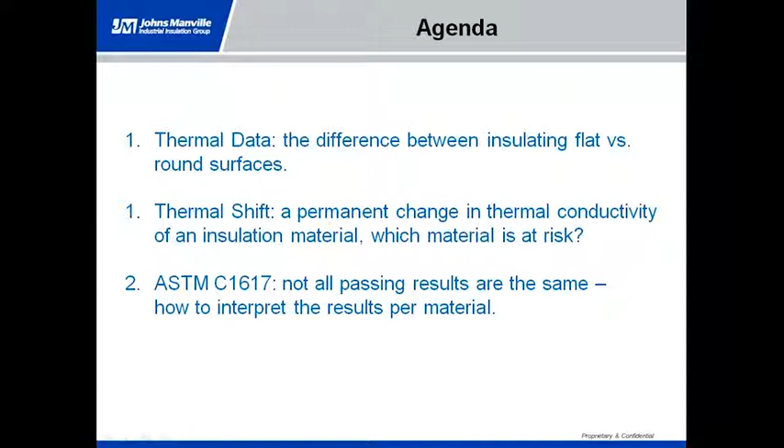Not all passing results are the same. I'll explain the differences in passing results and thresholds for ASTM C1617 for each of the standard industrial insulation materials. To start, insulation covers a very wide range of temperatures, from as low as minus 450 degrees Fahrenheit up to 3,000 degrees Fahrenheit. For industrial installations, and for the focus of this presentation, we'll limit that range to 61 degrees Fahrenheit to 1,500 degrees Fahrenheit.

Johns Manville does offer products that can be used in the low temperature range, as well as products that can be used in the low end of the refractory range, but the focus here will primarily be on the intermediate and high temperatures.

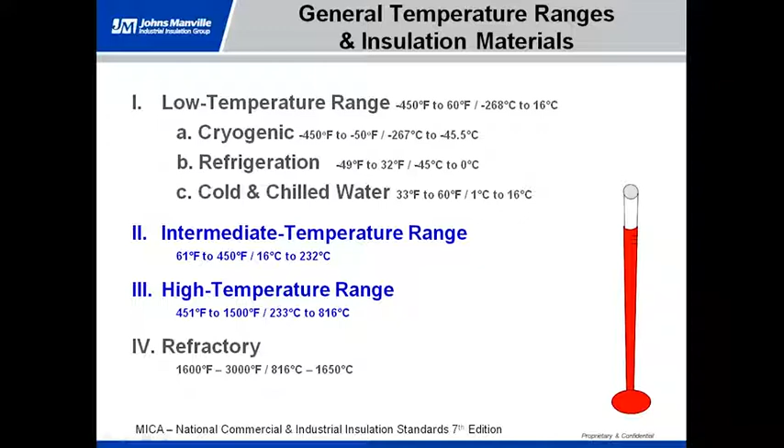Here are some examples of insulation material types we have. Note that the majority of materials used in intermediate to high temperature ranges are silica based. There are also foams, both plastic and glass, which provide better low temperature performance due to their inherent moisture-resistant properties. The problem with higher temperatures and foam insulations is that heat tends to deteriorate these materials. Cellular glass is also a good option for low temperature applications because it has pretty good resistance to moisture infiltration.

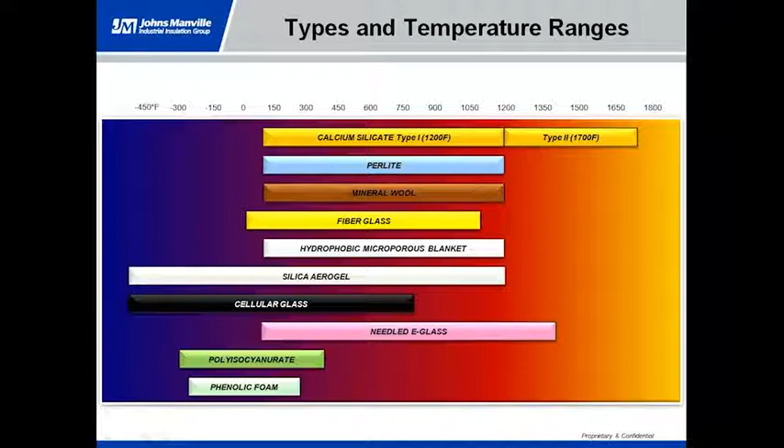We find intermediate and high temperature applications in industrial processes primarily focused on refining, processing, power generation, manufacturing, and marine. Insulations used in these applications must be able to resist heat, physical stresses, vibration, and worker traffic. This is probably the most demanding insulation category there is. Energy-intensive processes benefit from insulation for many reasons, which we'll cover next.

There are 9 good reasons to use insulation, but we'll focus on 3 aspects. First, personnel protection from hot pipes and vessels — we want to keep surface temperature at 140 degrees Fahrenheit or lower to reduce the risk of first-degree burns. It also provides a cooler work environment that reduces the risk of heat stroke. If the piping runs indoors, insulation can also help reduce the interior temperature of the building, which lowers the air conditioning or heat load.

The second aspect is improved process control and heat conservation. The more you can maintain your process within a given range, the easier it is to keep that process from fluctuating dramatically. This also means you can count on using the same amount of energy, so you're not constantly trying to heat things up to compensate for heat lost through ineffective or compromised insulation. The other thing, which most people don't think about, is corrosion protection.

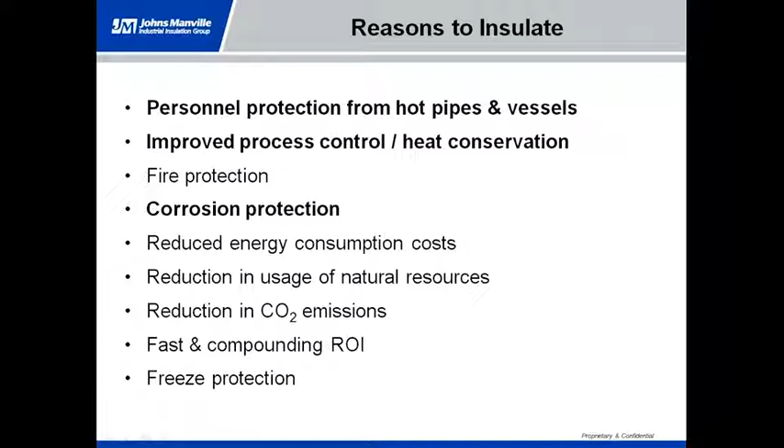The first topic we're going to talk about is thermal data and the difference between insulating round versus flat surfaces. We want to make sure you're using the right information. The challenge is there are several sources for thermal data: manufacturers' data sheets, trade organizations, the internet, and the American Society for Testing and Materials, or ASTM.

Now, the consequences of using the wrong data are increased heat loss, which is wasted resources and money. You have higher insulation surface temperatures, which means a higher potential for burns. And if it's inside, we have a higher likelihood of heat stroke and an increased air conditioning load.

The other thing we don't normally think about with insulation is we want to make sure we have a factor of safety with the products we're considering using. That gives a little bit of flexibility and a cushion in our system, so in case something does become compromised, it's not going to be as bad when a safety factor is built into it.

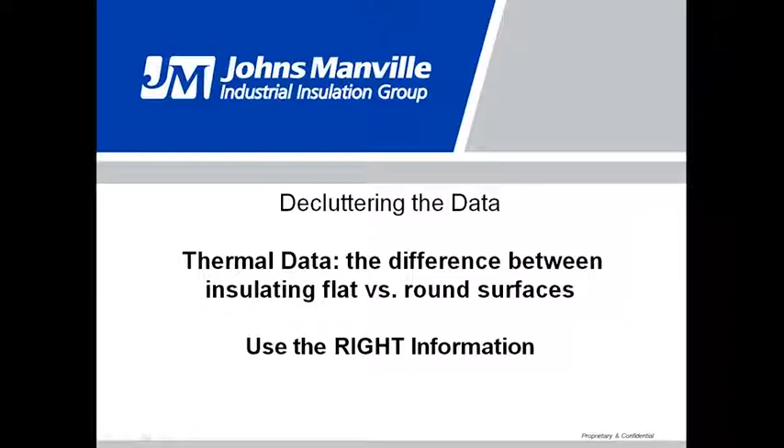Now, when we talk about thermal data, the first place we start is looking at K values. A K value is the thermal conductivity of a material. The units for that are on the left-hand axis, where a K value, at least in U.S. units, is BTU inches per hour square foot per Fahrenheit degree. Or in metric, it would be watts per meter Kelvin.

Basically, this thermal conductivity is a measure of how much heat flows through a material in a given period of time. The lower the K value, the lower the amount of heat that travels through a material in a given period of time.

Now, in all cases, note that as you go from a lower temperature of 100 degrees up to 800 degrees, the thermal conductivity goes up, which means the rate that heat flows through the material also goes up. This is largely a component of radiative heat transfer.

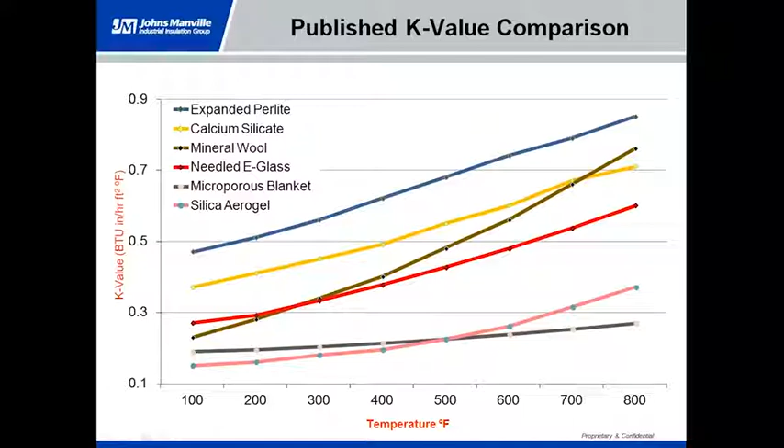Now, because K values are a thermal property, we can measure that performance quite easily. We simply have a hot plate, which in this apparatus would be either the top or the bottom, and a cold plate on the opposite side. You just measure how much energy you have to put into the hot plate to keep everything at equilibrium. For example, for most building insulation, the hot plate would be at 100 degrees, the lower plate at 50 degrees, for a mean temperature of 75, and you apply only enough heat to maintain those temperatures. From that, you can determine what that K value is.

So I just used the 75 degree mean temperature reference, and of course with industrial insulation it starts at 100 and goes all the way to 1200 to 1500 degrees.

So the flat test is pretty straightforward. It's what they call one-dimensional heat flow, and those typically give the best results, or the lowest results, I should say. If you look at ASTM C335, it's a little bit different.

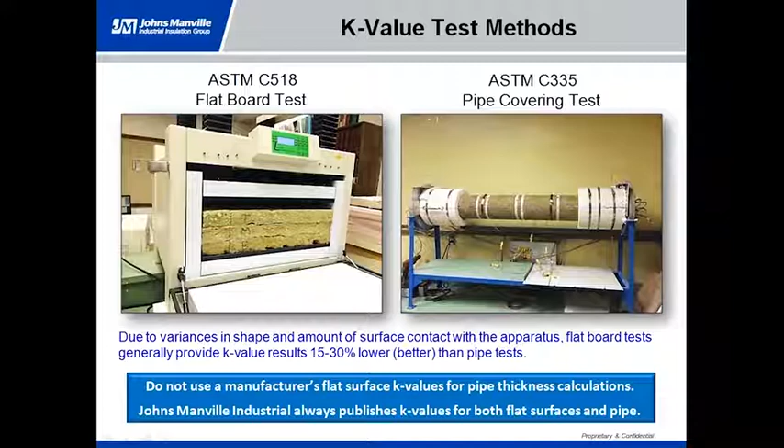So to start off with, we talk about material specs, and in this case we have calcium silicate. ASTM has a standard specification for all insulation material types. They have them for calcium silicate, perlite, mineral wool, microporous, and silica aerogel products.

Now, looking at this set of data, we have ASTM C518, which is flat testing, and we develop a thermal curve. And how we do this, again, we started at a set point at 100 degrees. So we have a hot plate, a cold plate. We wait for everything to come at equilibrium. We take a measurement. We increase the mean temperature to 200 degrees. Wait for it to come to equilibrium. We take another measurement. We do that until we get to, in this example, up to 900 degrees. Kind of another giveaway that this is flat testing is we can go up to 900 degrees and still get a decent data point.

Now, when we do the round testing, again, we have that mean temperature that's much harder to accommodate because we have to get our pipe temperature so hot. So if you look at the data here between 100 and 200 degrees, very similar, probably within the uncertainties of the test method, so there's some overlap there. But at 300 degrees, we see that things start to change a little bit. And again, we also notice that the pipe testing is translated up. So a higher value means we're going to have more heat loss than we're going to have with a lower value.

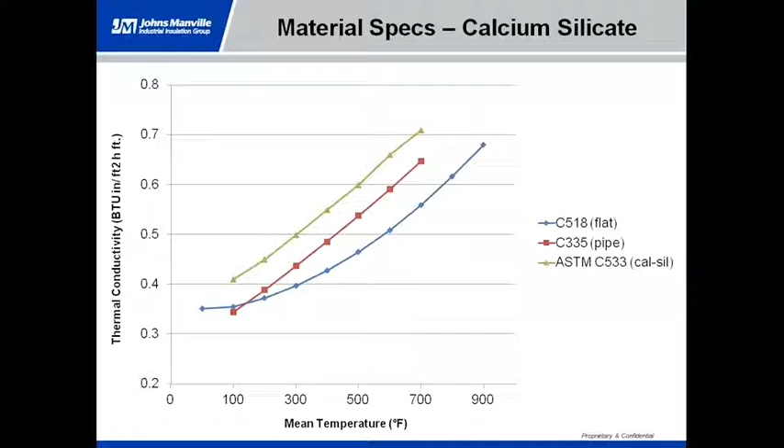Now, if we look at all the products in this category, just looking for example in the upper left-hand corner, you can see that the standard specification, the same slide we looked at before, scaled a bit differently, but you see that our ASTM line is the highest.

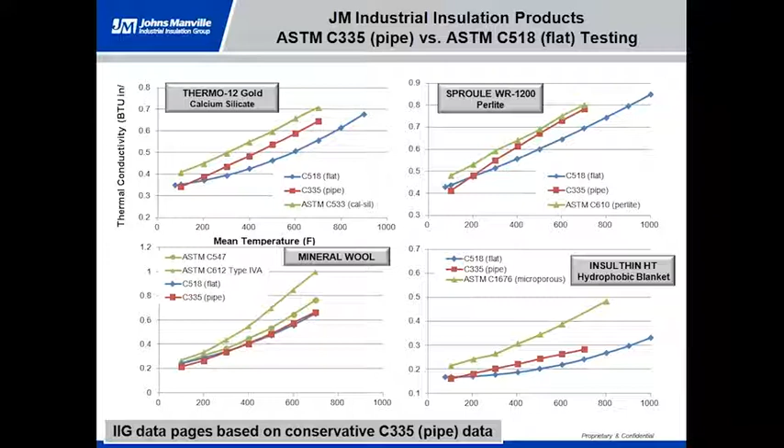Next we have our pipe data, and below that our flat data. Looking over at Sproule, you see the same thing. If you go down to the lower left-hand corner, there's kind of an exception here. We talk about mineral wool. ASTM C547 is for the pipe configuration, and that has thermal values that are in the standard. Then there's also ASTM C612, a board standard specification with different requirements, which you can see is the higher line of those two greens. If you look, the product is still well below those lines. And then of course we have microporous in the lower right-hand corner.

Now, one example we have is silica aerogel blankets. This is kind of unique in the ASTM standard specification in that you have both flat and round values in the same standard. The closest thing on the prior example was mineral wool, where we had a different standard specification—one for boards, a different one for pipe. Silica aerogel incorporated those two thermal curves into one standard specification. So this is the line you're going to see for flat data. There's another line for the pipe data, and of course the product has to be at or below that line as well when tested in a pipe configuration.

Now here's the plot for flat data, and maybe kind of a giveaway—this was actually from a silica aerogel manufacturer's data sheet. If you look at this plot, it goes up to 1100 degrees, which tells us it's flat testing. Notice that it lays right on top of the ASTM C1728 flat testing, the C518 testing. So looking at this, I think it's safe to say that the ASTM and the data sheet are in agreement as far as what the requirements are, below the 1728 line.

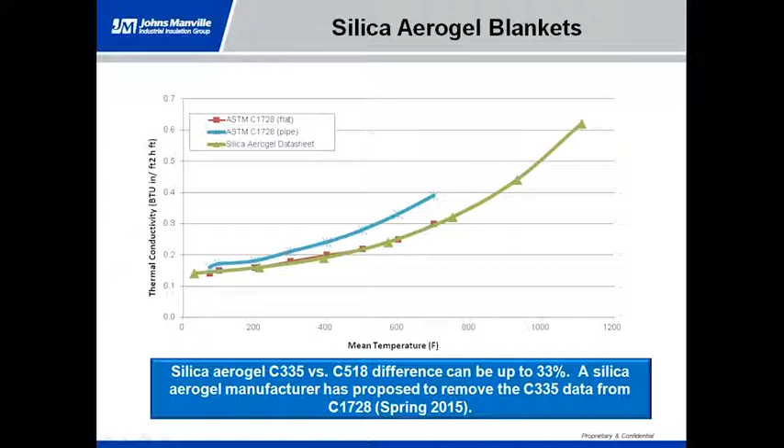Now, there has been a proposal to remove the pipe section altogether, which of course people have the right to do. But the concern is, number one, if you don't have that information there, how are you going to know which application this is for unless it's explicitly stated in the standard? But the other thing—if you look at the ASTM or the silica aerogel line and the ASTM line, they overlap. Whereas on the previous slide, you could see that the products tested were significantly below that ASTM line, so there's enough room for production variation or installation defects, things like that, that you could get by with using something that had been compromised or was a little bit off.

But in this case, because our data sheet and our ASTM requirements are kind of in line, we better hope that product we're using is going to perform the way it says, and maybe we need to add a factor of safety when specifying the silica aerogel blanket to make sure we have enough thickness there to cover our thermal requirements.

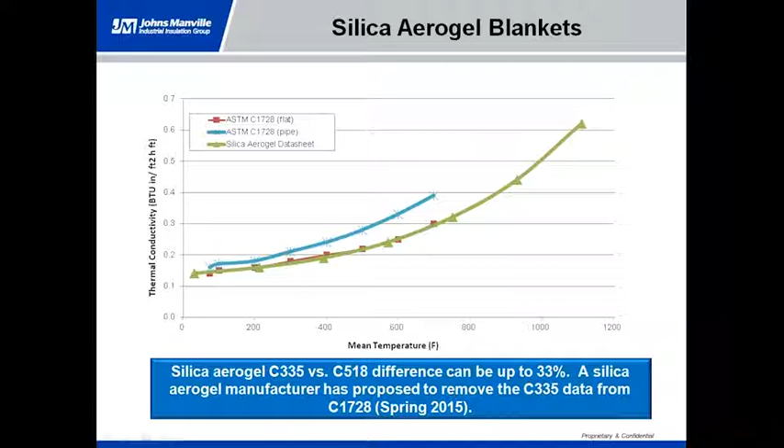Now, the first question that comes to mind is, well, that's great, but where do we get this data? The good news is that NAIMA, the North American Insulation Manufacturers Association, has 3E Plus software, which is free, and it comes preloaded with ASTM standard specifications for all insulation material types.

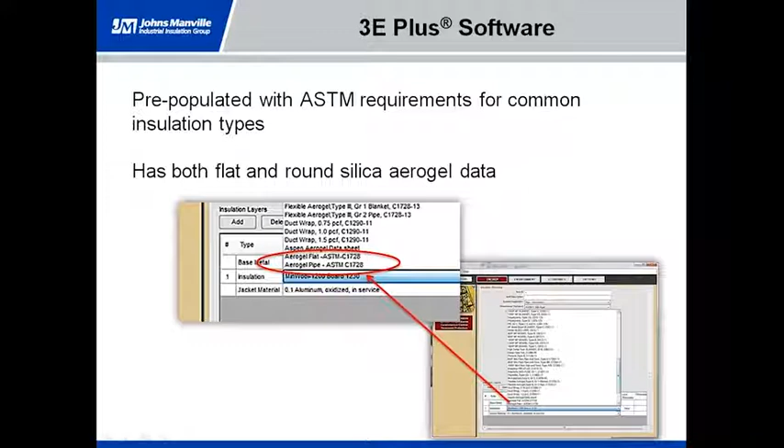And so, as we've been talking about, even preloaded into this software, we have aerogel flat versus aerogel pipe, with the ASTM requirements already built in. And if you look at the duct wrap product shown above, it shows the different densities, and the ASTM—in this case 1290-11—shows all the different thermal values for those products. So again, this doesn't come from manufacturer's data, but from ASTM, already preloaded. You don't have to go out and look for this data—it's already there.

Now here's one thing we haven't really talked about: a real-world example of why we care that there's a difference between flat versus round data. Looking at this example, we used an 8-inch pipe, 2,600 feet in length, under the conditions shown above.

If you look at the product used, if you would have selected the C518 data in the 3E Plus software versus C335, you would have had a 12-degree temperature difference, which would put you from a below 140-degree safe-to-touch temperature to 150, meaning you'd burn within a second after touching that hot surface. There's also a 55 BTU per hour per foot difference.

Which doesn't sound like a lot, but when you're talking about long lengths of pipe over long periods of time, going through our example, that's almost $7,000 a year, which is almost $140,000 over 20 years.

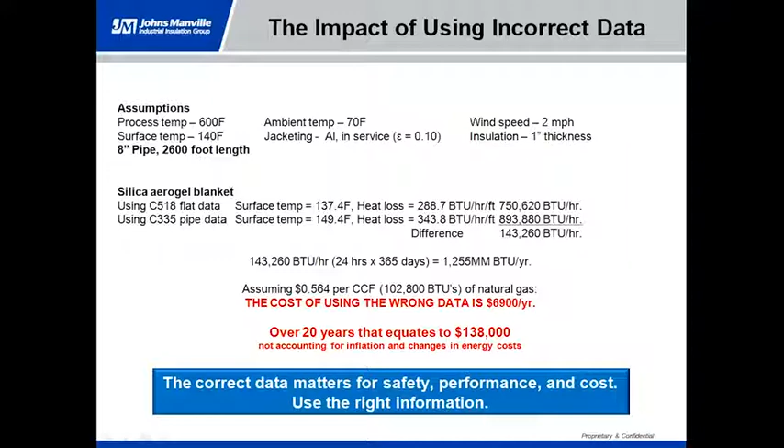So this is real money, and this isn't even at a particularly high temperature—if you have higher temperatures and longer lengths, these savings add up very quickly. So there's a real-world consequence to using the wrong data. It's a lot easier to add an increment as you're putting things together rather than having to go back and fix a hot surface or a system using more energy than it's supposed to.

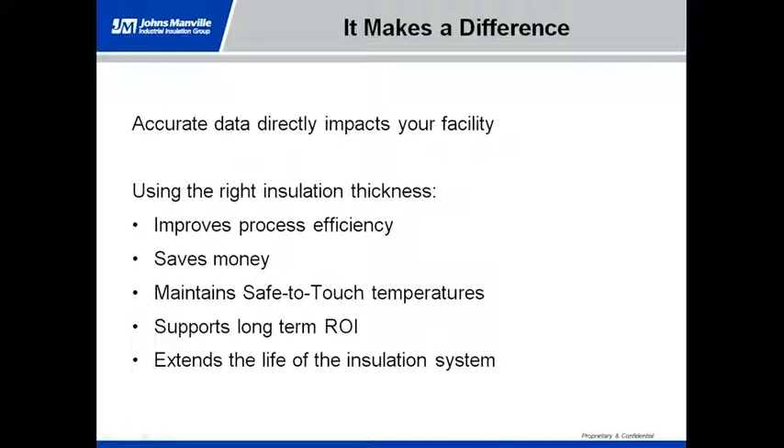So we talked about round versus flat testing and the potential implications of using the wrong data. Now that we know what information we can rely on, we can move on to thermal shift. Again, we want to make sure we're looking at this properly so we improve our process efficiency, save the money we're supposed to, maintain our safe-to-touch temperature, and make sure we have a good system we can rely on.

We begin our next topic: thermal shift. It's a permanent change in material conductivity of an insulation material, and there is a material that is at risk.

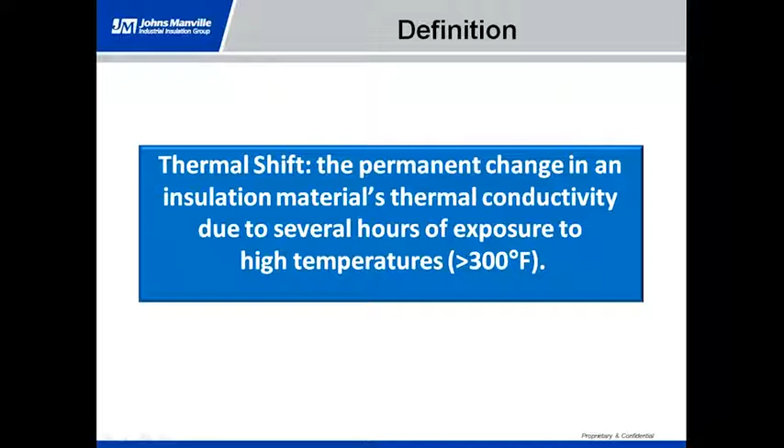We started this discussion with a definition: it's the permanent change in an insulation material's thermal conductivity due to several hours of exposure to high temperatures. The implication, of course, is that the thermal conductivity is going to increase, allowing a greater rate of heat transfer, meaning higher rates of heat loss or higher safe-to-touch temperatures.

So why is thermal shift bad? When we increase thermal conductivity, we increase heat flow, decrease thermal performance, and have higher heat loss and surface temperatures. Because of those increased heat flows and higher surface temperatures, we have increased burn potential and higher operating costs.

The material that's affected by this is the silica aerogel blanket. The traditional insulations we talked about earlier—calcium silicate, mineral wool, perlite, and microporous insulations—aren't affected by this.

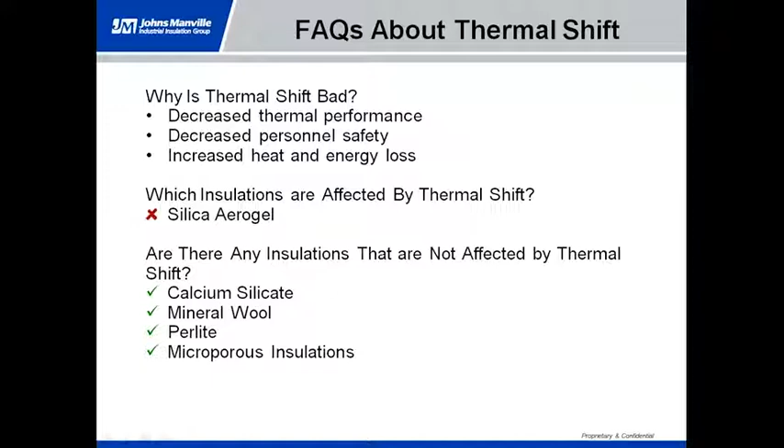To give you an example, this is what we tested, done using flat testing. Note on each of these plots we have the ASTM line, the purple line translated up from all the other lines. The two lines below it represent testing we described earlier, where we tested each individual set point, let everything cool, then tested it again.

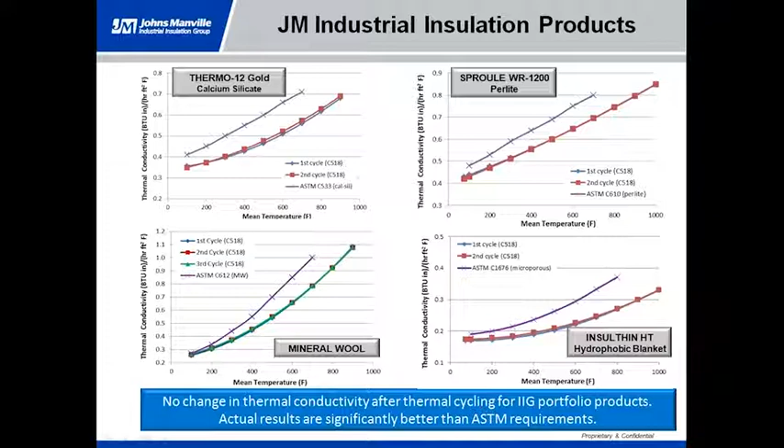What we saw is there are some very slight changes, as you can see with the THERMO-12 Gold calcium silicate product, and maybe a little with the InsulThin HT product, but generally those differences are very small, and one could argue they're within the uncertainty of the test method. I think it's fair to say those results are equivalent—there's no real change in thermal performance of these products, and they perform significantly better than what their ASTM standard specification requires.

Now, we did the same test with the silica aerogel blanket, and here's what we found. We start off with the ASTM C1728 maximum, which we saw in an earlier slide, and just below that, the blue line shows the first cycle of flat testing we had done with the silica aerogel blanket. For the most part, most of that product performs below the line, which is good. At some of the higher temperatures it's above—does it pass, does it fail?

I guess it depends on which temperature you're using, but maybe you could argue that it's close enough if that works for you. In my mind, it either passes or it doesn't. But when you test this product the second time, you see that the thermal performance translates up, and at no point does that product meet that specification, and it's considerably lower than that. So that's a problem. We're not talking just a few BTUs. This is a lot of energy and a lot of temperature we're dealing with here.

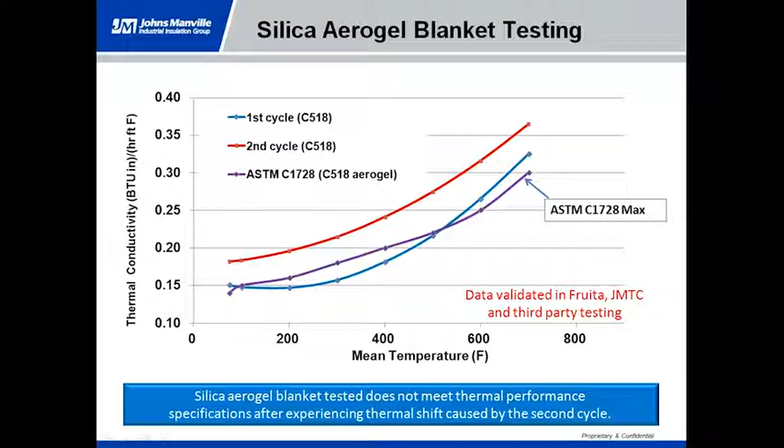Now, this isn't something specific to JM. We sent this to an outside lab to test this, to verify this, and this does occur. We'll see more about this on a subsequent slide.

So if we're looking at this, comparing it to the C335 round or pipe testing, again we see the same thing. There's a translation as it shifts up when we test it the second time. If you look at the two lower lines overlapping each other, that was our InsulThin blanket insulation that we also tested in the same configuration. Note that you can't see any appreciable difference between the two.

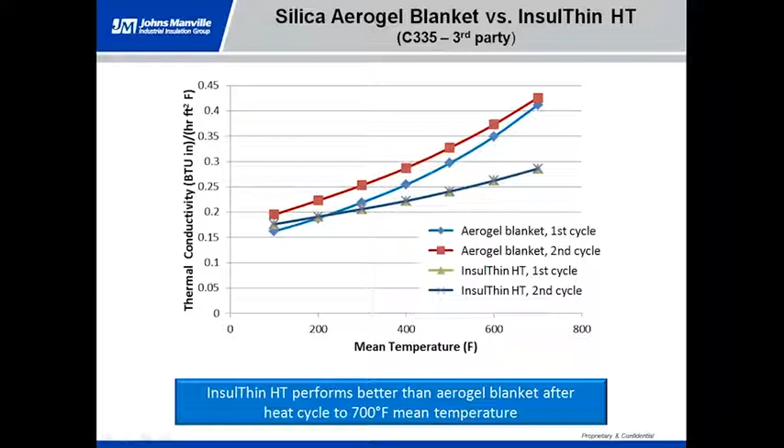And again, if you look at how the product performs at higher temperatures, it does a really good job. So the big question is, what exactly happens to the Silica aerogel product? Well, part of the requirements for the product is that a hydrophobe is added to help resist, to give some water repellency. But this hydrophobe oxidizes at 300 to 600 degrees.

As this hydrophobe oxidizes, the aerogel structure is compromised, which results in a fracturing of the aerogel matrix, meaning it breaks everything up. Now when this happens, the thermal performance is permanently compromised and heat-affected areas are no longer hydrophobic. Because we've already fractured this, we can't put everything back together again. And because of this, our thermal performance degrades to roughly the performance of the needle glass mat used as a substrate for this blanket product.

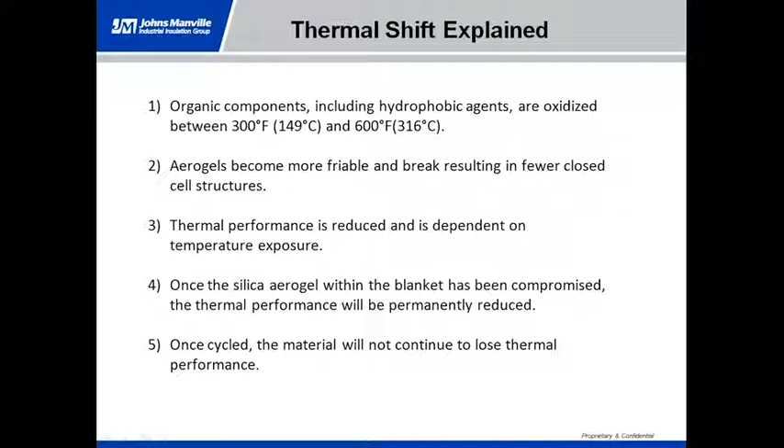Now, what aerogel does is provide all these small air pockets, but if all these air pockets are fractured and turned into much smaller pieces, there's nothing there to help reduce that heat transfer, that heat flow through the material. Now, because we've oxidized that hydrophobe on there, our product is no longer water repellent once it's been exposed to temperatures of 300 degrees or above.

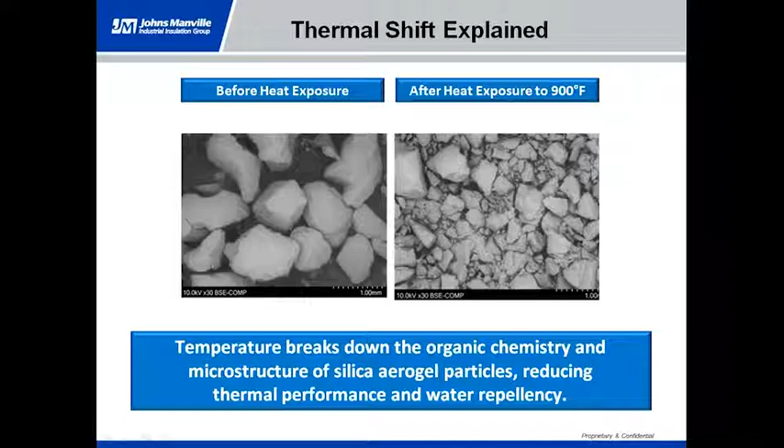Now, because it causes a permanent physical change, and we do know this happens, there's a way to work around that. Combining our first point about round versus flat data, we're going to combine that with thermal shifting to show how we can get around this.

If you look at our first example, it's an 800-degree pipe, and we have flat design ASTM data versus our thermal shifted data. You can see that if we use our design data, we're at a 45 millimeter thickness with a surface temperature of 138 degrees. But if we use the thermal shift data for the same thickness, our surface temperature is now 150 degrees. Now we need a 55 millimeter thickness to get our surface temperature back down to 140 degrees.

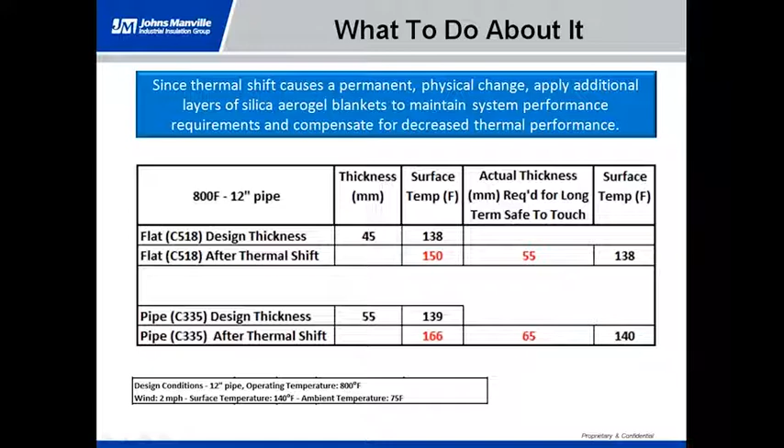So of course, we know our pipe data is not going to perform as well as our flat data. So our initial thickness starts at 55 millimeters for 140 degrees. But again, if we use our thermal shifted data, surface temperature is now 166 degrees. So again, we have to add additional thickness, 10 millimeters, to make a 65 millimeter thickness to get our surface temperature down to 140 degrees.

So long story short, those materials can be used, but there are some things you need to do. You're going to have to add at least one layer to make sure that you're bringing your temperatures and your heat losses down to what they were prior to that compromised value.

Moving on to our final topic, we're going to talk about ASTM C1617 and that not all passing results are the same.

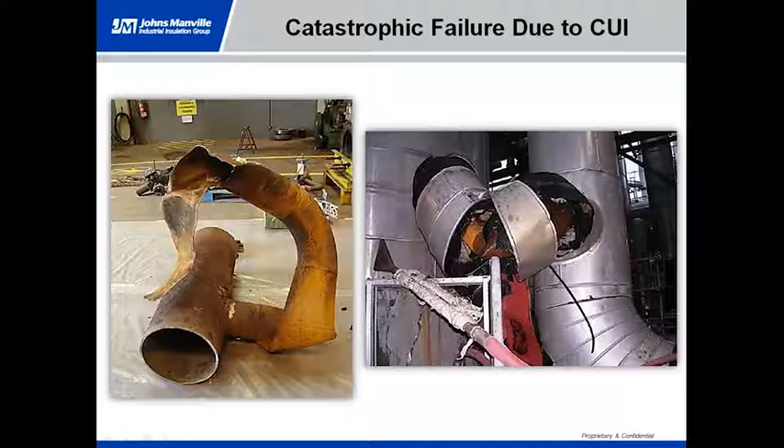In the course of construction and maintenance, it's necessary for insulated equipment to be idle for long periods of time, and during this time moisture can and most likely does infiltrate the system. It's usually exposed through sudden storms, improper storage, improper installation, damage to the jacketing, or damage to the lagging. All the above can allow moisture to penetrate into the system. Now, all these scenarios create a potential situation for corrosion under the insulation, and the results can be catastrophic, as we see in these pictures here, where things corrode to the extent where they rupture and create significant damage, not to mention downtime.

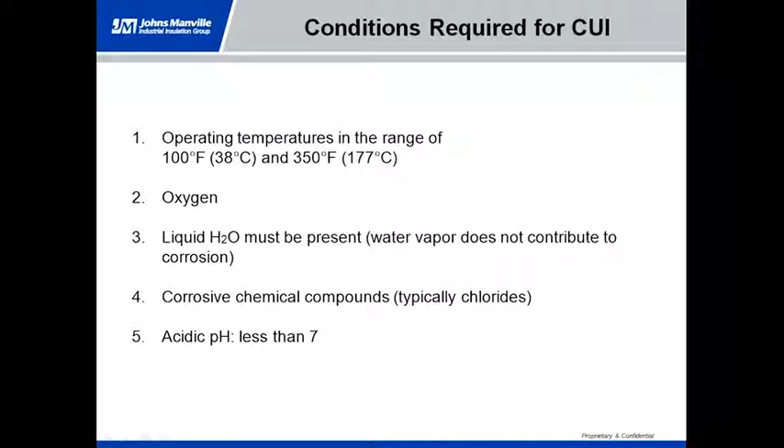Now, what we need for corrosion to happen is an operating temperature of 100 to 350 degrees. Corrosion can also occur outside of that range, but this is the sweet spot for corrosion. We need oxygen, we need liquid water to be present. Now, water vapor or high humidity conditions doesn't contribute to corrosion—you need to have a liquid to help conduct or facilitate corrosion. You need corrosive chemical compounds, which are typically chlorides found in seawater and drinking water, and then acidic pH, which means it has to have a pH value of less than 7.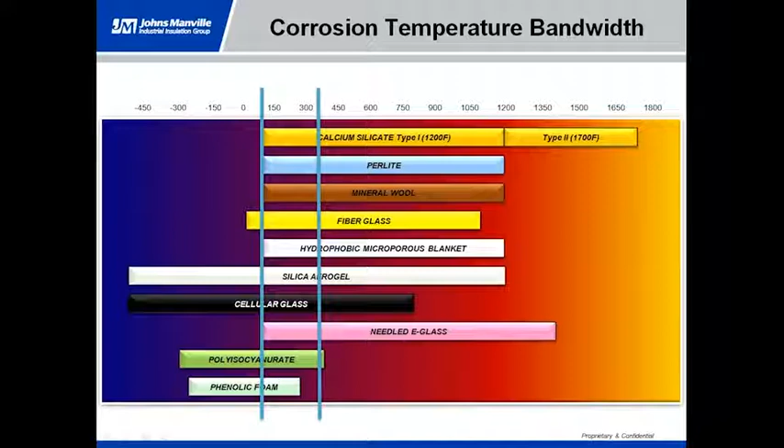And again, every insulation type in that temperature range is going to fall into that, whether it's a polyiso foam or a calcium silicate pipe insulation.

Now, there's a new method that was developed by many manufacturers, and corrosion testing is always a problem because you always want something that's quick enough to model real life, but also has to be realistic and applicable. In this case, this test method is applicable to carbon steel. The advantage it has is it's more quantitative than qualitative, compared with some of the other methods, and it's developed mostly for carbon steel—there aren't as many test methods out there for that.

Now, what's involved with this test is the insulation material is ground up with distilled water. You take a metal coupon and weigh it, then glue a tube to it, which you see in the image on the right-hand side, and you drip this insulation solution on top of a plate heated to 230 degrees plus or minus 10 degrees. The point is that as this water boils off the surface with this leachate, it creates a very corrosive environment. That's what we're trying to simulate, but not to the point where you're dropping water on something really hot, or trying to boil water off because it wasn't hot enough—it's just the right mixture of boiling to corrode.

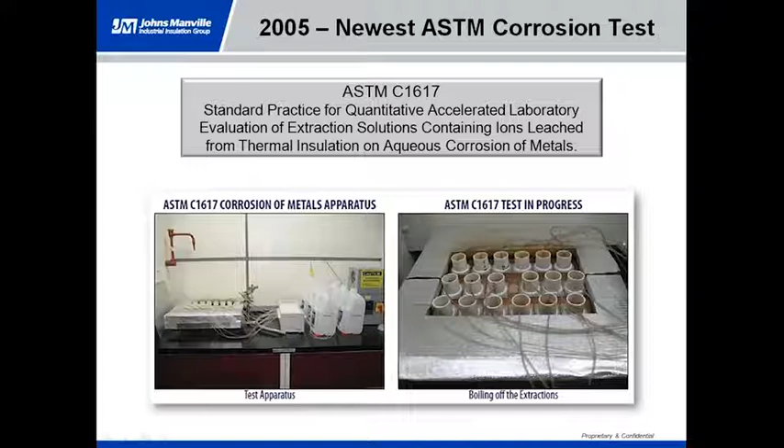Once the test is run, for 96 hours, those coupons are cleaned and then weighed, and that change in weight is used to give you a mass loss corrosion rate in mils per year, or MCLR. Now, whenever we run this test, to make sure you're not running it in a vacuum, you always want some control as a reference point. There are 3 that are typically used, and 4 available, but 3 typically used: one is DI water, or deionized or distilled water, which has less than 0.1 part per million of chloride solution; there's a 1 part per million chloride solution, and a 5 part per million chloride solution. So the higher the concentration of the chloride solution, the higher the corrosion rate.

So what happens is, when we get done, we have a kind of ranking here. Going from left to right: mineral wool, and even jumping in the middle where the pre-2002 calcium silicate is, you have pretty high corrosion rates. Silica aerogel is a little bit better. You look at InsulThin and DI water, they're about the same. And then you have the Thermo-12 Gold and the Sproule products, which are below DI water. So what this means in terms of corrosion, if you look at the boxes on the left-hand side, is your deionized water has a mass loss corrosion rate of about 6.4 mils per year.

The 1 part per million chloride solution is more like 41 mils per year. So when we look at all these materials, they pass their respective ASTM rates, but as you can see, there's very different corrosion rates.

One of the takeaways here is that the pass rates are established based on whether you're using deionized water or the 1 part per million chloride solution. In this case, using the DI water reference point, the Thermo-12 Gold and the Sproule perform much better than that standard. The InsulThin HT is consistently below it, but at times flirts with that threshold, while the Thermo-12 and the Sproule consistently are better than that.

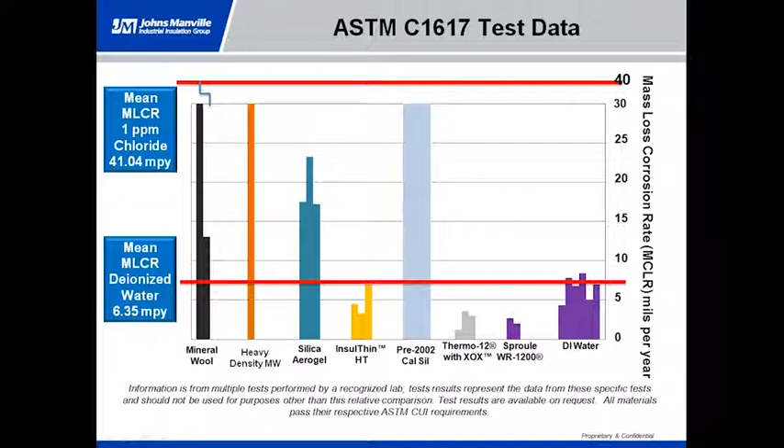Now if you look at the mineral wool products, the Silica Aerogel, they're always consistently below the 1 part per million chloride. So even though they're below a given threshold, you can't say that their performance is equivalent.

One example of this is that we've talked a couple times about standard specifications for insulations. If you look at the blue boxes at the top of the table, we start with ASTM C533, which is calcium silicate, and their requirement is that the corrosion has to be less than the DI water reference, and in this case it does. As we saw in the previous slide, it's significantly lower than that threshold.

Now if you look at ASTM C1728, which is for flexible aerogel insulation, or ASTM C665, they use a less than 5 part per million chloride solution. And again, that's the most corrosive reference that there is. You could go as high as 10, but those are extreme cases.

Again, looking at pass-fail, they pass their respective requirements in that they're less than 5 parts per million. But if you're comparing it to the DI water limit, they would fail because they're above the DI water, though they're below the 5 part per million threshold. So again, when you say that it passes C1617, you also have to ask, well, at what limit?

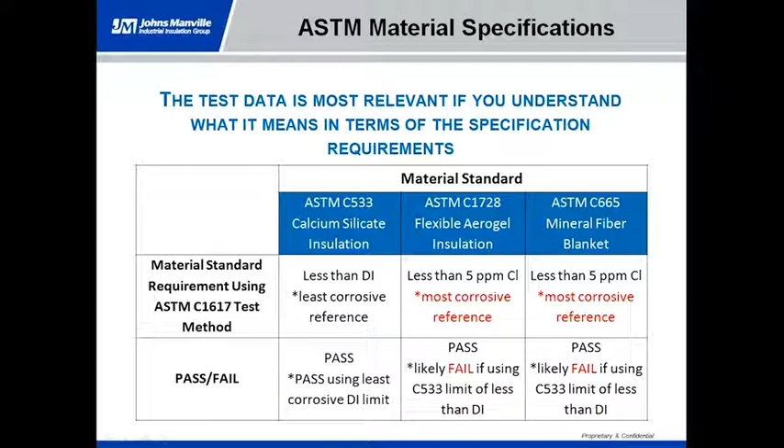This is a test, and tests are always open to interpretation. A test just gives us a result, but the standard specification gives us a criteria as to whether that passes or not. So in this case, the calcium silicate is going to perform much better in this situation than the flexible aerogel blanket with a mineral fiber blanket.

Just to give you an idea, here's some actual metal coupons. If you look on the left two, for either the Sproule or the Thermo 12 Gold, which have the XOX inhibitor, you can see that there's very little degradation to the face. No pitting, no gouging. It looks almost like new metal.

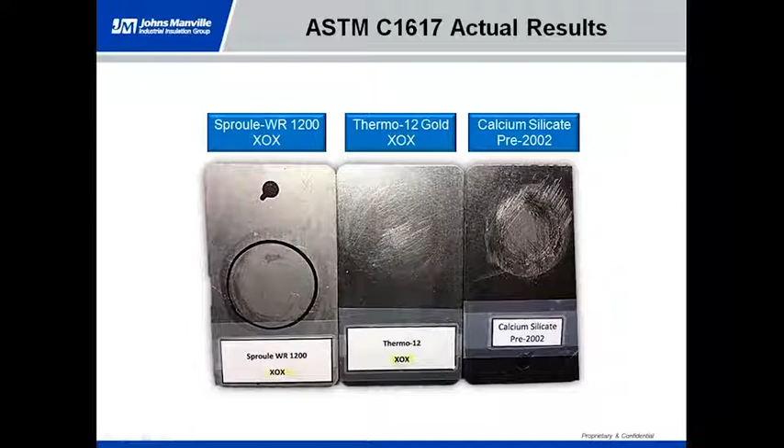If you look at the calcium silicate pre-2002, you can see there's a lot more activity or degradation that was done when they tried to clean that off. So there's a lot more corrosion going on there than there were with the other products with the corrosion inhibitor.

So to summarize, when we're looking at ASTM specifications that have the same passing requirements, you need to understand the different corrosion potential for each material. Ideally, if you want to use a corrosion inhibitor, hydrophobic insulations aren't a bad idea. They help repel water, but again, that's only part of it. What are you going to do when water gets into your system and comes into and stays in that place between your pipe and your insulation? You want something there that's going to be able to take care of that.

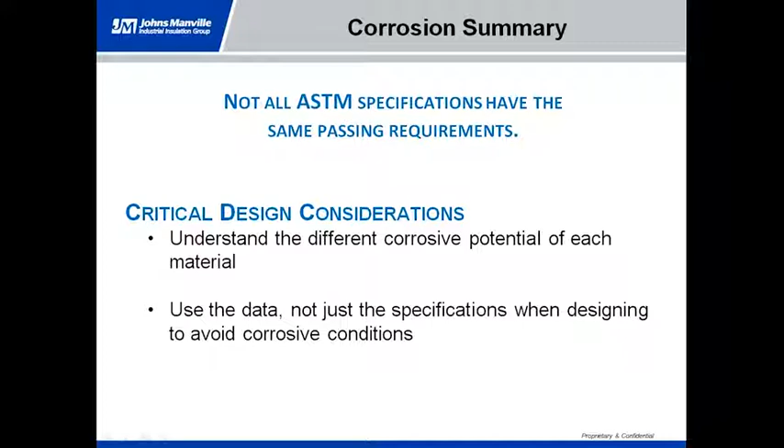Again, a passing result, you always want to look into that and understand what is passing. Is it an A+ if you get less than DI water, but maybe it's a D if you pass 5 parts per million? It all depends on your threshold, and clearly if you want to minimize corrosion, you want to use the lowest threshold as possible.

Now, to summarize what we've talked about with thermal data, we know that there's pipe and flat applications, and we always want to ask the right questions and use the right data because it does make a difference, as we've seen. And depending on the temperature and the application, it could be substantial.

We talked about thermal shift, which is a permanent change in an insulation's thermal performance, and we know that it happens in applications above 300 degrees Fahrenheit. Knowing that this occurs, a designer can compensate for the degraded material by adding additional layer or layers of insulation. So again, you want to use the 3E+ software and try to figure out how many layers. In our example at 600 degrees or 800 degrees, we saw that it was one additional layer.

Finally, for ASTM C1617, not all specifications have the same passing requirement. Again, it depends on the product type, and there are different passing limits for C1617, and the calcium silicate is the most stringent. Want to make sure that you keep that in mind.